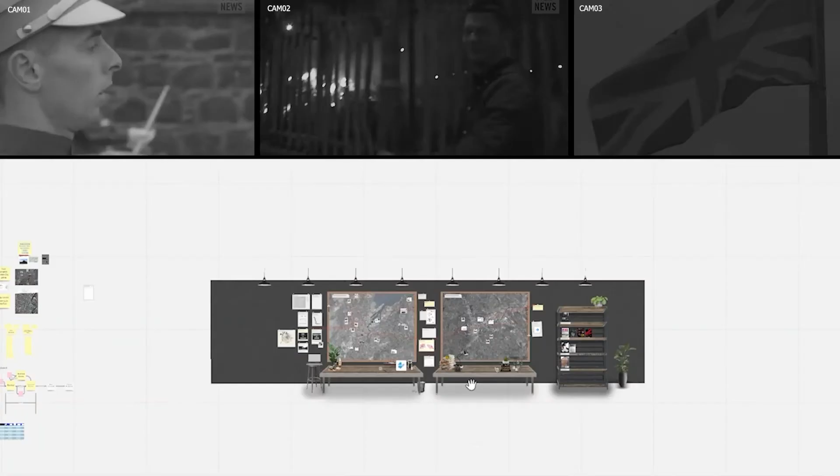Belfast is a city synonymous with the Troubles, but whilst known for the physical barriers that divide communities, it became apparent that the peace walls are just the manifestation of less visible socio-economic divides, especially those related to deprivation, access to food, and essential public services within the city.

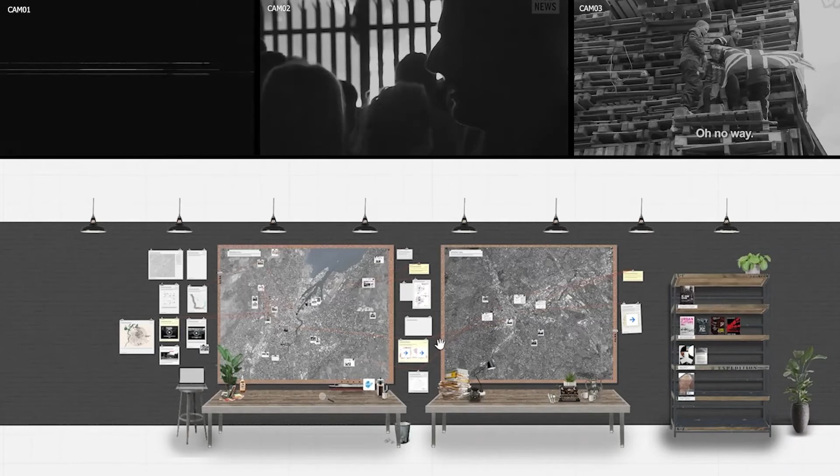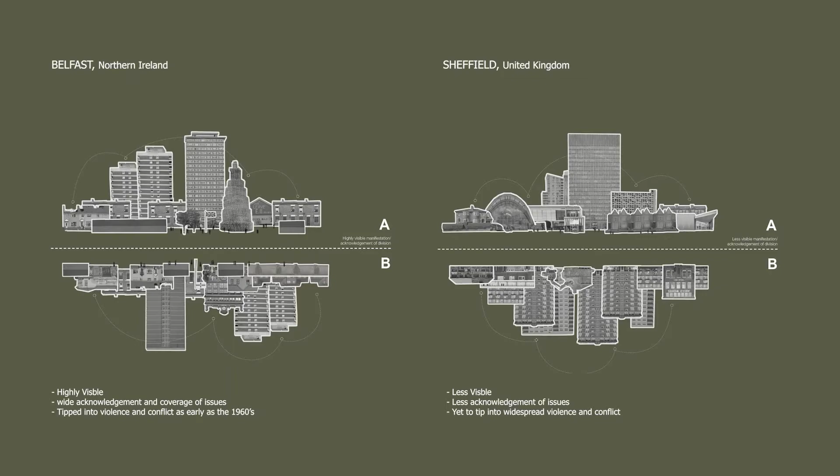Exploring the divides within the city of Sheffield allowed us to explore a more nuanced look at the divisions in the Northern Irish capital. Peace walls stretch 21 miles, and whilst constructed to separate communities and keep the peace, they have prolonged a state of anxiety and tension.

What has resulted is 14 of 20 of the most deprived areas being located directly next to an interface, their history causing a lack of investment, mass vacancies, and high unemployment.

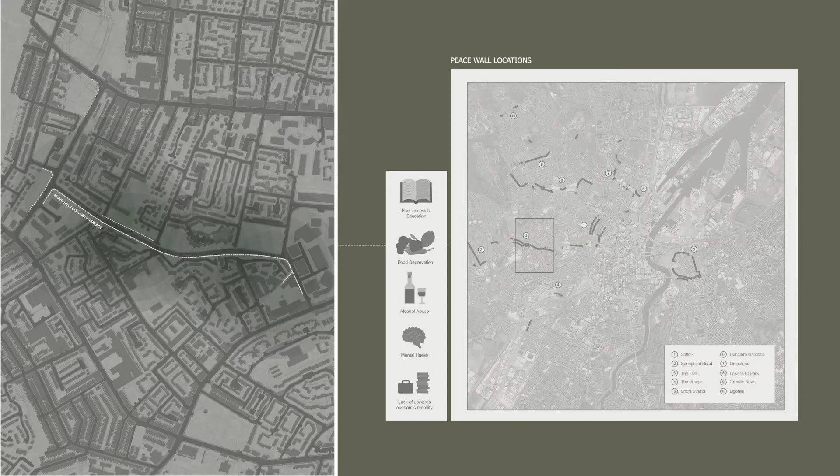The area surrounding the Shankill Peace Wall is a prime example of how proximity correlates with heightened levels of food deprivation, mental illness, and alcohol abuse. Unstable governance has only exacerbated these problems, heavily reducing public spending towards these areas.

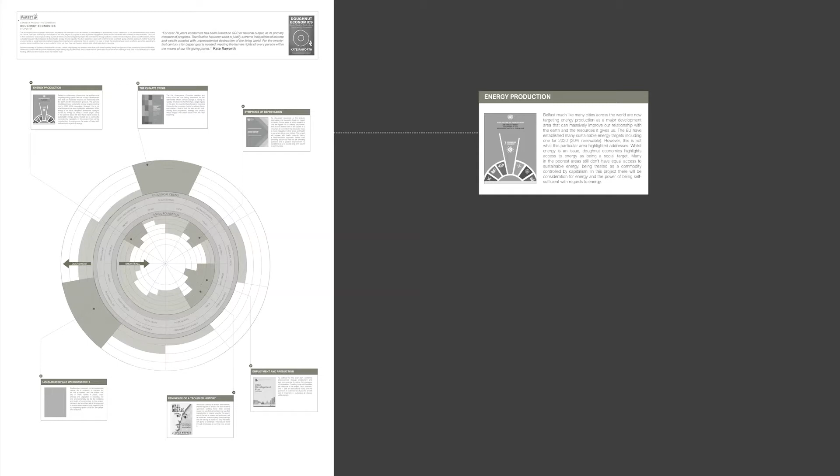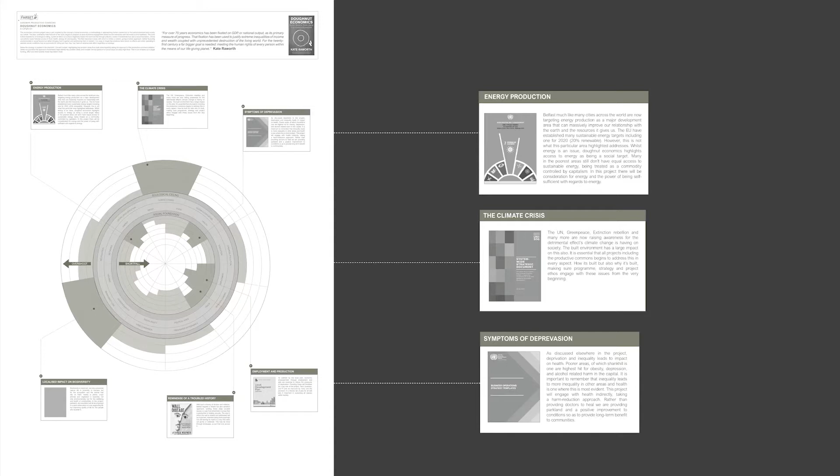The peace walls were erected as a short-term retroactive solution, attempting to solve complex grievances. It became clear that many of the social issues mentioned previously are tackled in a similar after-the-fact approach. Whilst a necessary component of a solution, food banks, rehabilitation centres, etc., aim to relieve the symptoms of the divided city after the fact, rather than tackling the societal challenges that cause them.

This project therefore engages with a more long-term proactive strategy to work alongside traditional support methods, targeting funding at deeper societal challenges, providing improved opportunities in education, employment, and quality of environment.

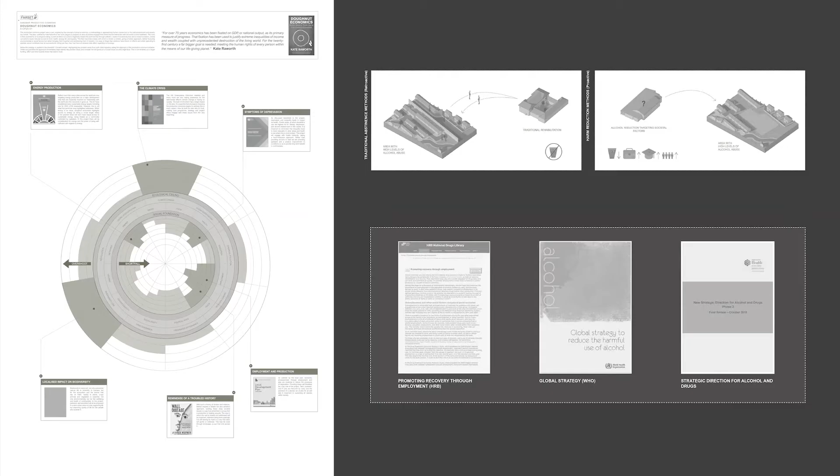Urban planning has focused on turning communities' backs on one another, creating a labyrinth of cul-de-sacs, fenced parks, and no man's lands that remain vacant.

In Shankill, we see the impact of these design decisions. This no man's land has an incredibly low density with a high vacancy rate. 60,000 square metres of land is wasted along this stretch of wall alone.

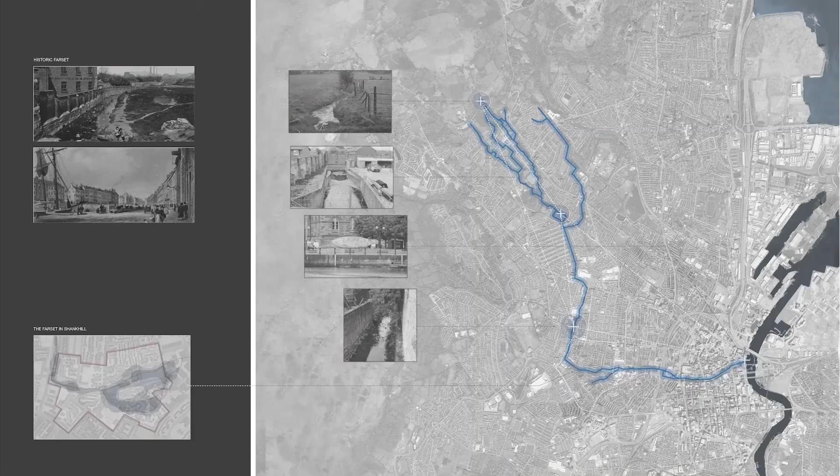Lying at points as little as half a metre below the pavement, running almost poetically along the line of the peace wall, the Farset River helped establish these communities before being culverted in the 1800s.

In its heyday, it supported the creation of industry, energy production, and a more integrated community, with shared investment and local trade before production was removed to the edgelands.

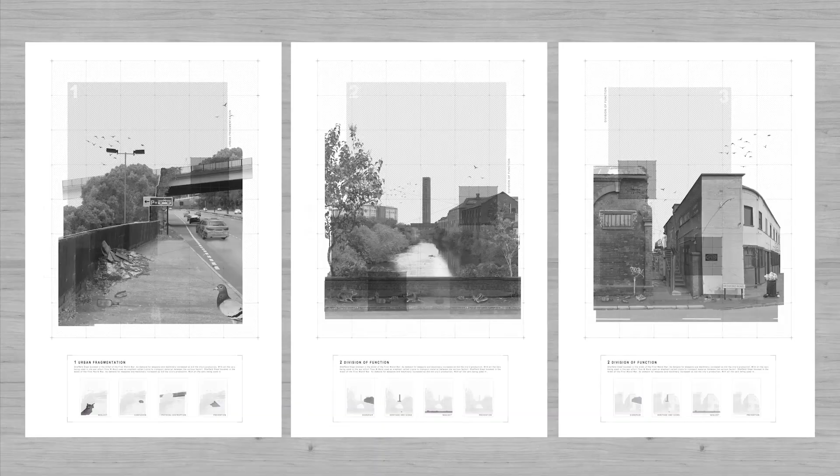Illegally distilled poitín, a homebrewed variant, became an act of activism. Outlawed by the British for tax reasons, the act of production became political, and allowed many the ability to become economically independent. This project therefore begins to speculate.

What would happen if in 2025, aligned with the proposed removal of the peace walls, Belfast Council initiated the Farset project, using the long-buried river, returning it and the land either side to the people living in some of the most deprived communities in the capital?

A more proactive approach, addressing the symptoms of division, both socially and economically empowering the residents. The aim, to prototype and test the use of commonly owned productive land, and question its role in combating the symptoms of the post-conflict divided city, and to help dissolve formal and informal barriers within communities.

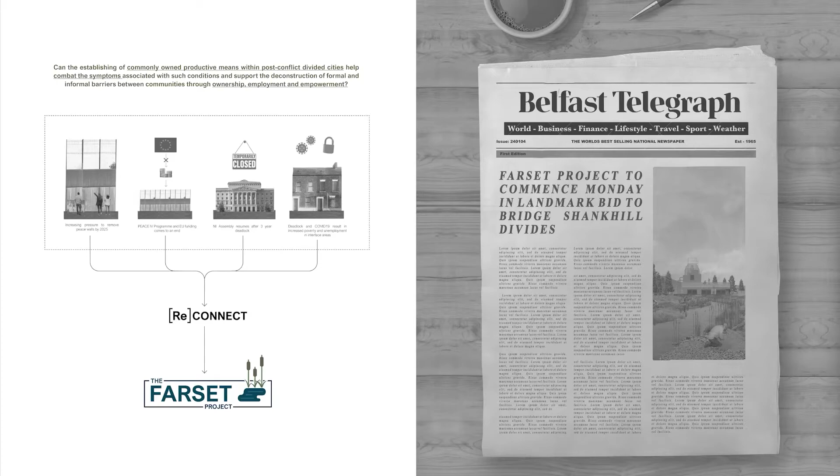Brexit and coronavirus make it a key moment for the city to propose new strategies relating to trade, production, and renewal. The river will enable a productive commons, community-owned and managed land, first using vacant sites that neighbour peace walls.

Northern Ireland's green space target was used for scale, and production is to include the growing of crops and construction materials, utilising rewilding to provide new parkland, woodland, and wetland.

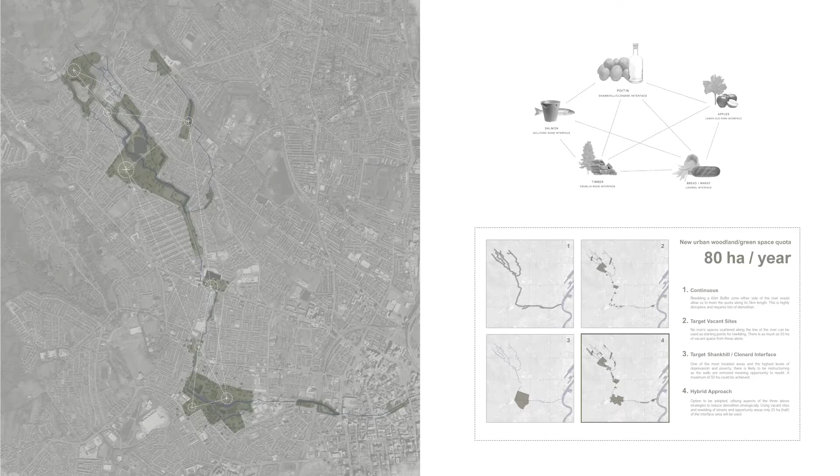A distributed network will link the divided communities together, the various processes providing jobs for a range of skill sets and the ability to invest money back into these communities.

Here are some explorative collages, the river creating a more productive permeable barrier, and the reintegration of both industry and nature back into the proximity of communities.

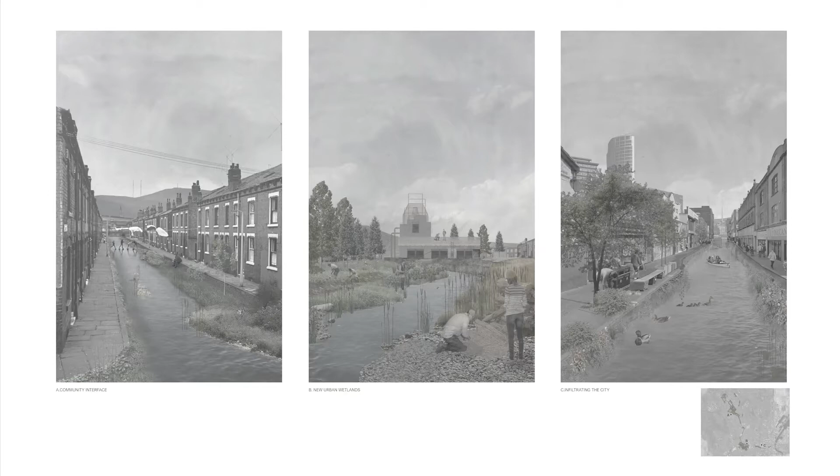The heart of the commons will lie around the Shankill interface. Potatoes, apples, and other regional crops are produced.

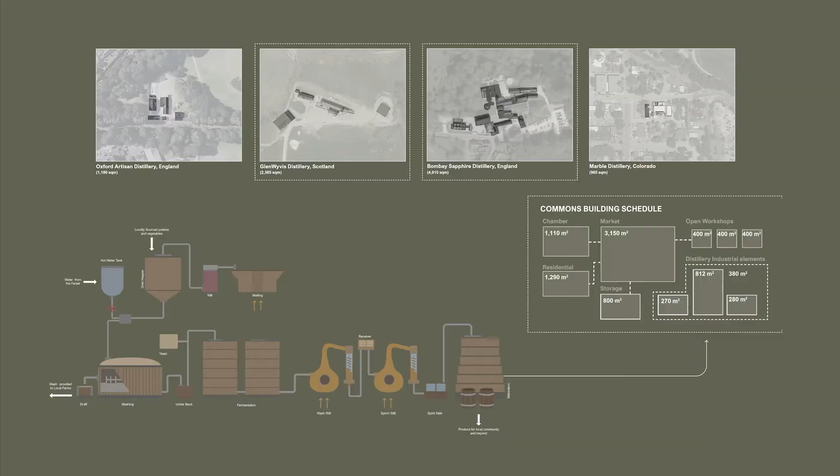An unconventional mixing of functions, a main commons building is to become the central point of governance, combining spaces for commons management with a market to bridge the gap between production and consumption, and a distillery producing poitín, making use of the locally sourced produce.

The commons becomes an independent zone where production is legalised. The project is initiated in 2025.

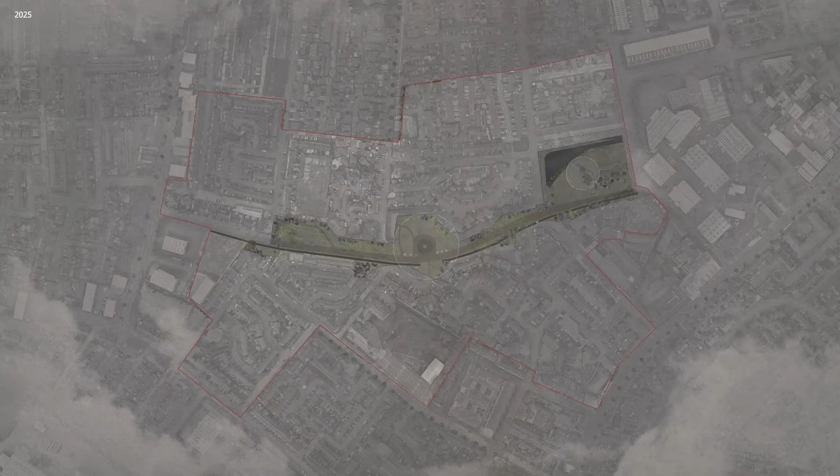Vacant sites are reclaimed near to the wall, and the rewilding begins. Cupar Way is reclaimed, the first element of the wall is removed, enabling the community to begin consultation and establish the community land trust that will manage the commons.

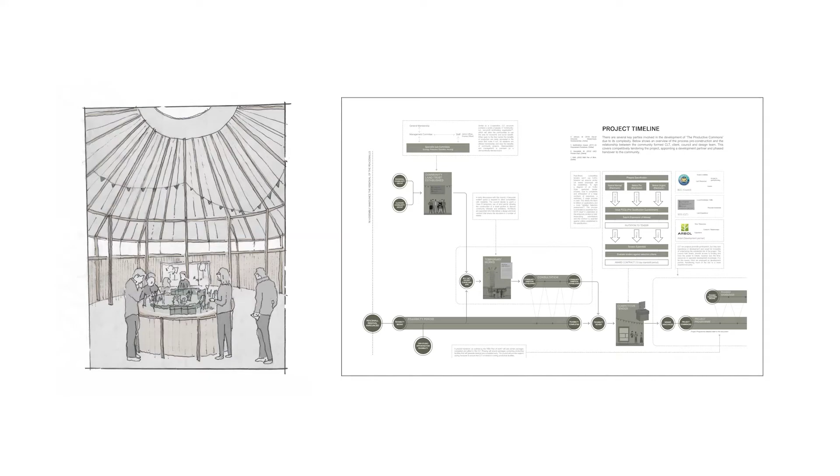Beginning with light touch reclaiming of the abandoned plots, the commons will spread from the wall, a series of productive pavilions being deployed as the area is restructured.

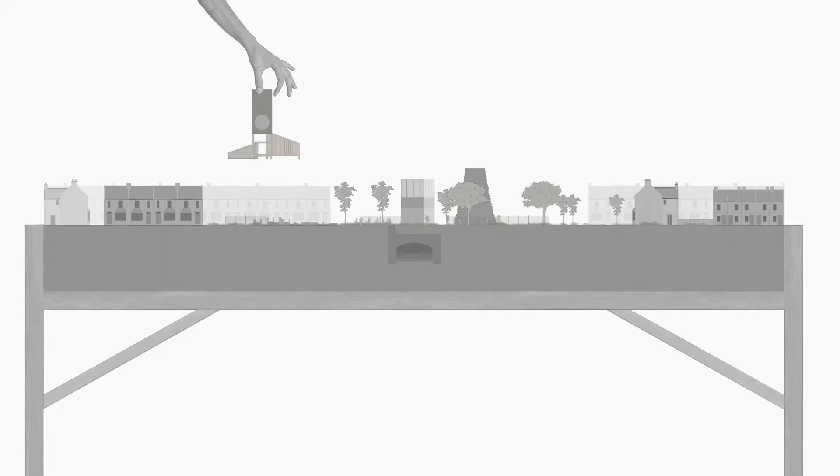The river is revealed supporting this new production, with densification around the peripheries to support the few who were displaced. Whilst often controversial, the incredibly low density of the area and its dysfunctional nature make densification a viable strategy, supported by future planning guides and reports, targeting 60 to 70 units a hectare.

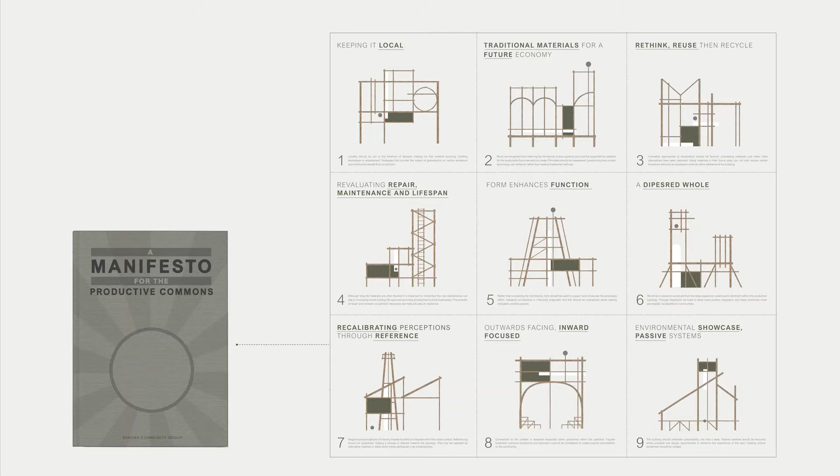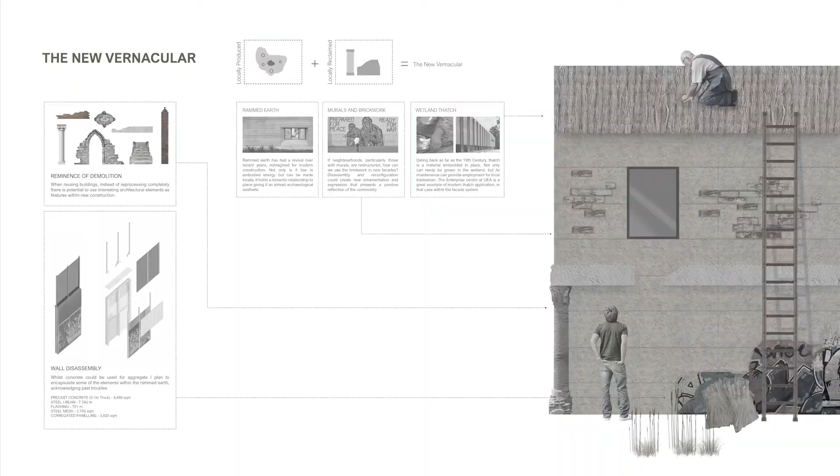With much of the wall still in place, it is used for growing, a meanwhile project to be replicated across the city. The community established a manifesto for their architectural approach, emphasising locality. Reuse is favoured, making use of the resources of the abandoned homes, and repair is recognised for its benefits to education and local employment.

The material palette uses not only locally produced timber, but rammed earth from the groundworks of the common land. Routes and phasing were developed through the layering of both historic routes that traverse the site and the line of the river. In 2028, demolition begins on some of the vacant properties nearest to the wall, enabling the rewilding spread and production to begin.

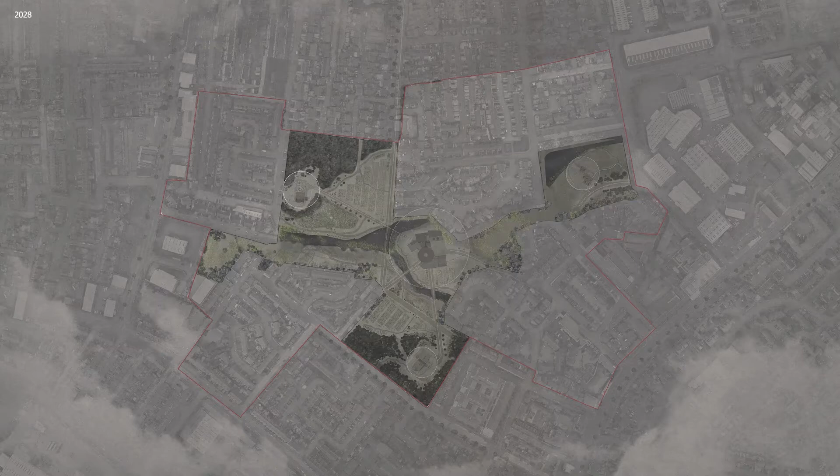The first of a number of productive follies is constructed in the remnants of one of the homes. Its purpose is to collect, prepare, and store the material reclaimed from the homes, to be used in the construction of the Commons building and the surrounding area.

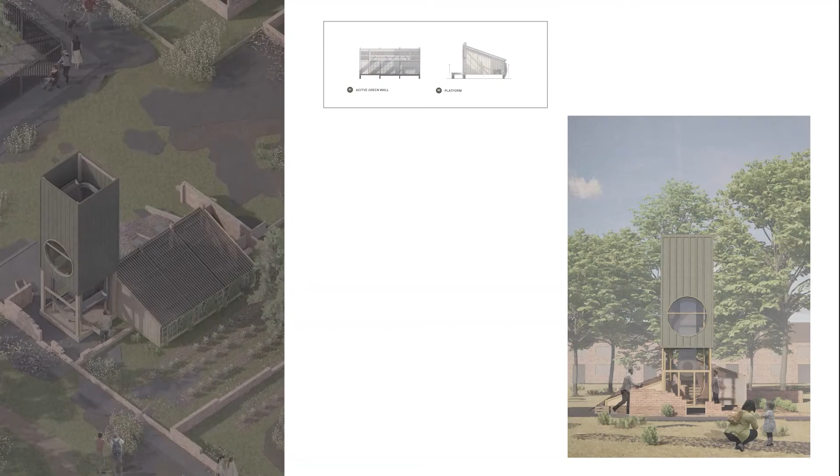Space is provided for the testing of a site-specific mix of rammed earth, which is to be used across the Commons. The demolished housing and land displaced for landscaping is catalogued and used within the Commons.

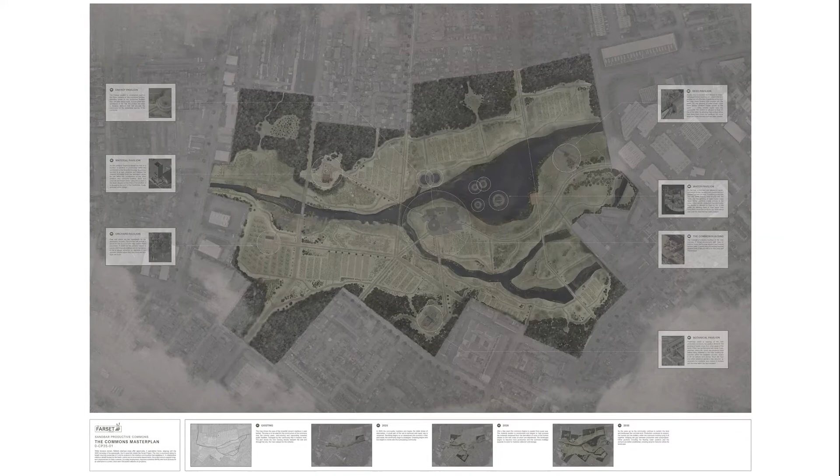The Commons continues to grow, spreading from these vacant sites, creating the new parkland. The landscape holds not only the Commons building, but a range of follies supporting productive activities. An overlapping of natural and logistical straight paths, with dispersed elements all linking back to the centre.

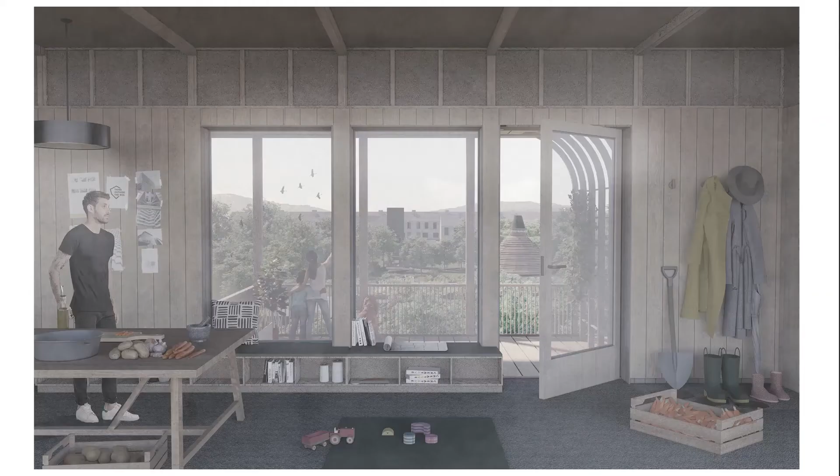Here are a number of studies showing the created ecotones that will foster biodiverse but also dynamic conditions across the site. As mentioned, high-quality housing for the few residents whose homes were removed will be constructed on vacant sites that now sit on the peripheries of the Commons, with views out across the parkland.

As always, the rolling hills of the Black Mountain and Divis serve as a backdrop overseeing the restructuring. A number of pavilions are constructed, including the Groundskeeper's Pavilion, a botanical garden, not only serving to facilitate the distillery of fruits for flavouring, but creating moments of discovery and excitement within the Commons.

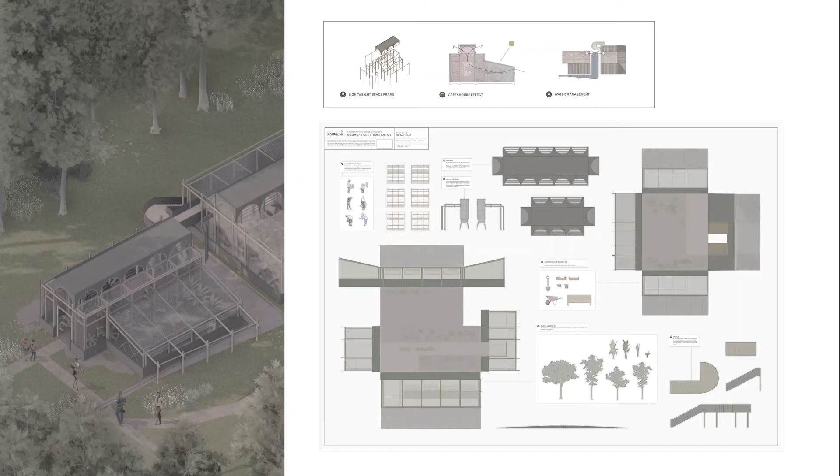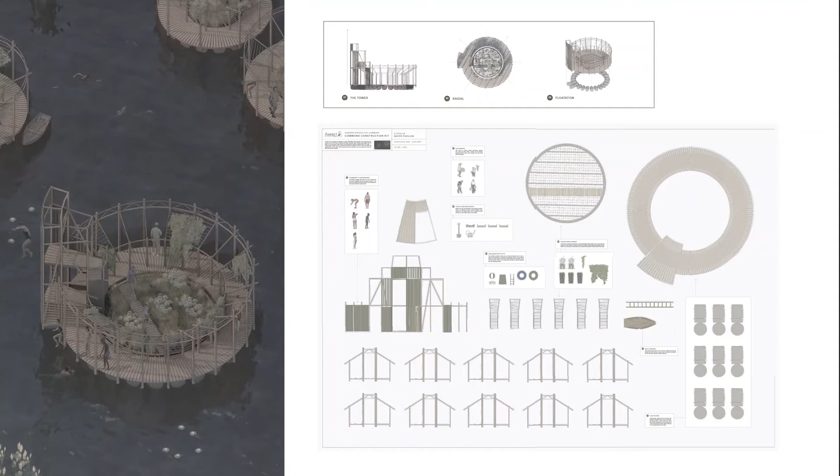Likewise, floating aquaponics gardens on the lake created in the centre experiment with new growing techniques, but also engage with the community through play in the summer months. All pavilions have been designed as a simple kit of parts to be assembled by the community.

A feature in the wetland, the Thatcher's Pavilion provides resources for workers to collect reeds and engage in the long-standing tradition of thatch production. The platform extends out towards the water, and the structure doubles as a hide, presenting opportunity to observe birds, beavers, and other animals that create their home within the parkland.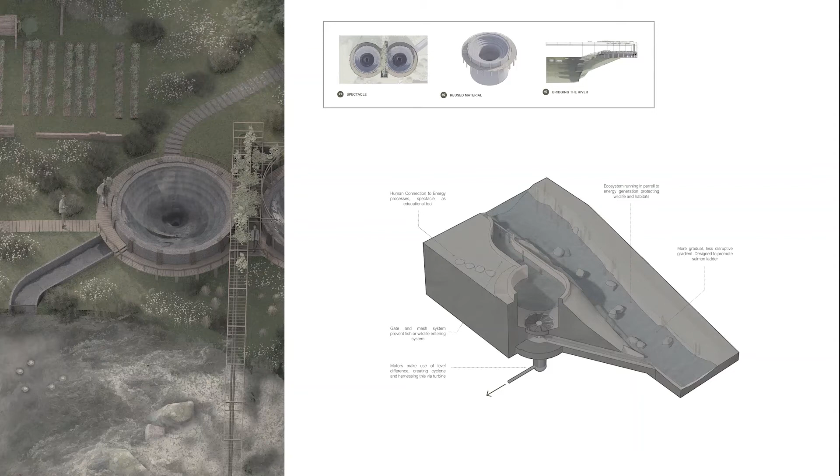A pavilion for harnessing the power of the Farset is also constructed, adjacent to the new Commons building, and is used to power productive activity. Making a feature of the process, it begins to highlight the sustainable agenda of the initiative.

The form was developed through the breaking down of a rigid external rammed wall, responding to the immediate landscape. Multiple means of approach respond to its shared ownership, and allow the landscape to reclaim the central space over time. Treating the rammed earth exterior almost as if an existing structure, materiality breaks down into softer timber facing the courtyard.

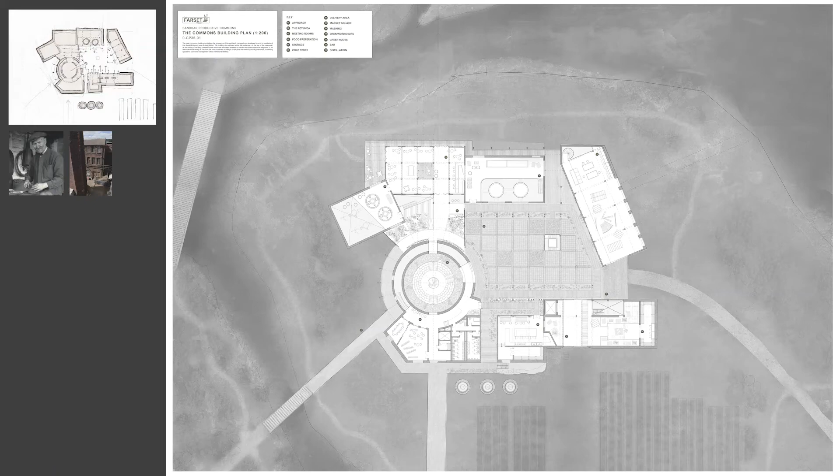This all revolves around the rotunda, a central space where the community can come together to oversee the Commons. The only circular element in plan, the rammed earth walls breaking down.

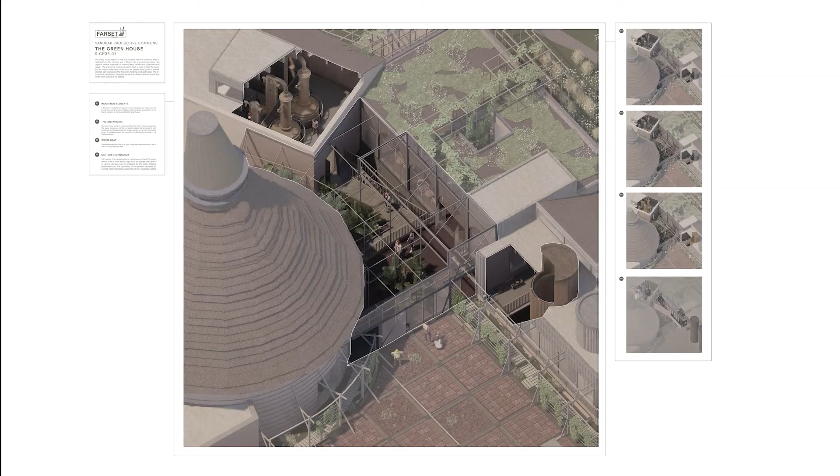The space looks through to an enclosed garden greenhouse that acts to connect elements of the building, but also makes use of some of the heat expelled from the distillation below ground. The greenhouse produces the few ingredients such as grapes and oranges that can't be grown as well locally. This is an example of the many cases where the line between leisure and production is blurred, intentionally to promote engagement and education.

Industrial elements were initially sunken, using the ground to control heat. Tall elements in timber and thatch rise above the rammed earth perimeter wall, revealing the previously illegal processes. The landscape was brought up on either side. The rotunda's form, referenced in the traditional oast house, enables passive ventilation.

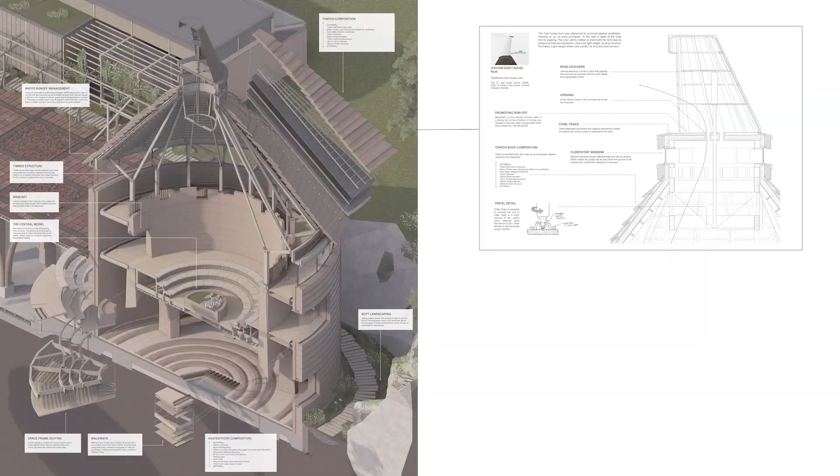The drying process occurs below the rotunda, and its form pulls the heat up, heating public spaces. The building opens up to the right-hand side towards the water, where air can be drawn through.

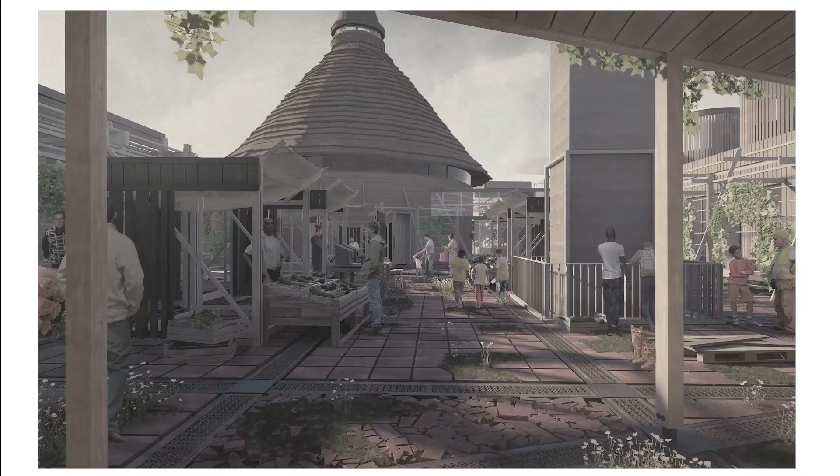Here we see the open workshops, another key space which plays off Belfast's upstart culture and provides essential spaces for a number of craft people to work in the Commons. Their craft is displayed in the courtyard, where we also see residents with produce of the Commons.

Here we see the permeable broken brick floor that manages water, capturing it for distillation and plant maintenance, but also allowing the landscape to infiltrate the central spaces.

Through the layering of the landscape, I wanted the building to respond to the passing of time, with the landscape that hides it morphing daily, monthly, and seasonally.

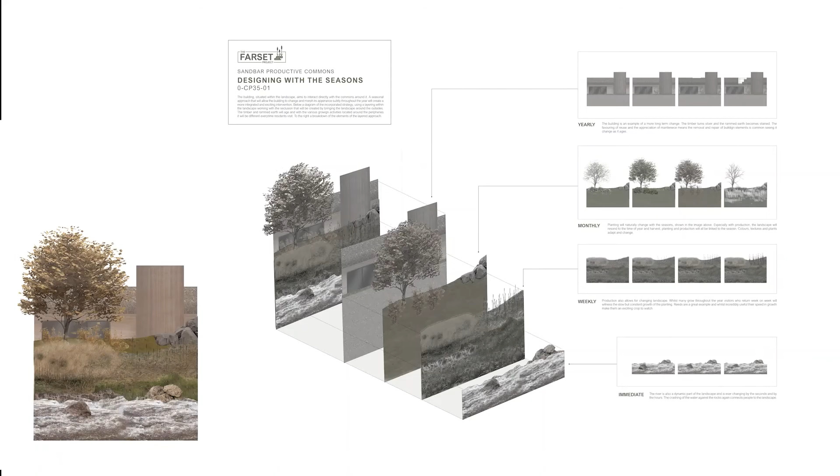In the summer months, parts of storage and workshop are opened up, allowing the landscape to creep back into the centre. A worn line in the grass, people congregate and discuss the harvest.

Inside the store, the light filters into the space, changing throughout the year, with glimpses through to the small kitchen, where small amounts of food can be prepared for markets and community events.

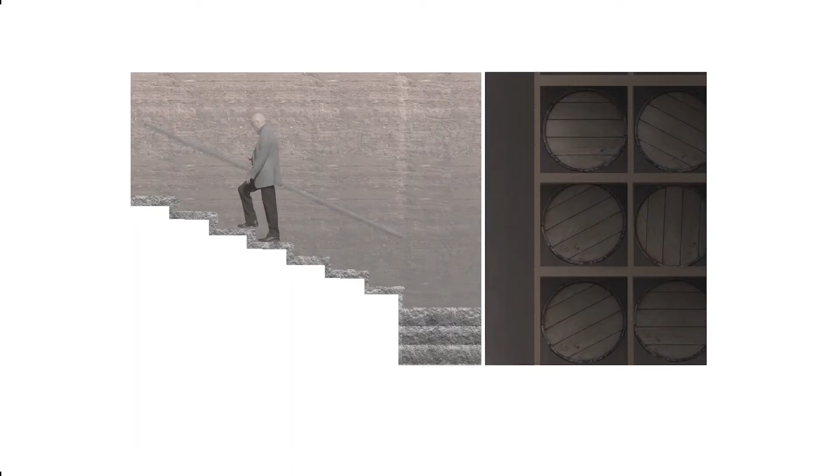Being sunken, the building begins to relate back to the earth that it is to sustain the community.

As visitors venture down into Cooper's Hall, home to the whisky stores, Coopers work producing new barrels, using the iconic arched barrel vaulted forms and scaling them to span the space.

With the parkland context, the building uses its basement in the winter months to store excess water when the stores are not active. The space doubles as a cavernous pool for the community, heated by that which is expelled from the other industrial processes.

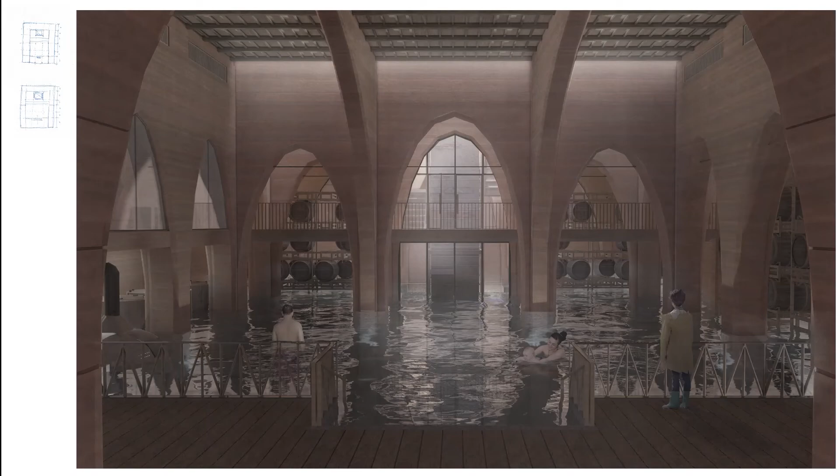A totem of rammed earth containing spolia, created from remnants of the divided city, brings light down into the space.

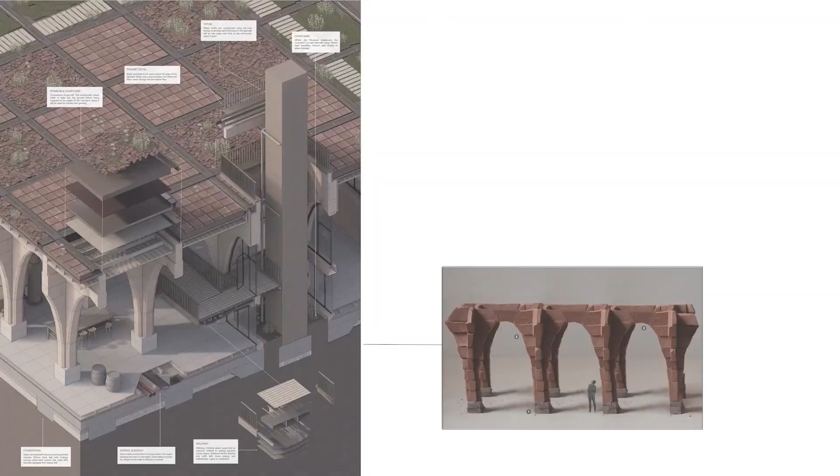Studies show some of the elements of spolia to be embedded around the building, archiving fabric from the city. This serves as a sensitive way to reflect on some of the area's more recent history.

Concrete lintels add texture to internal walls, roof tiles are used in rammed earth to create a horizontal rhythm, and a window from a derelict factory building is preserved within the fabric of the rammed earth.

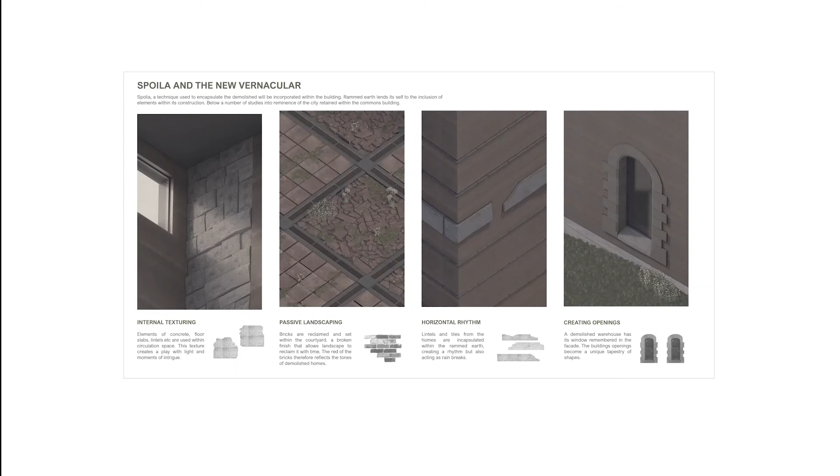Grating within the courtyard is used over the barrel vaults, which filters light coming down into the space, so as not to spoil the alcohol, and references a number of Celtic patterns.

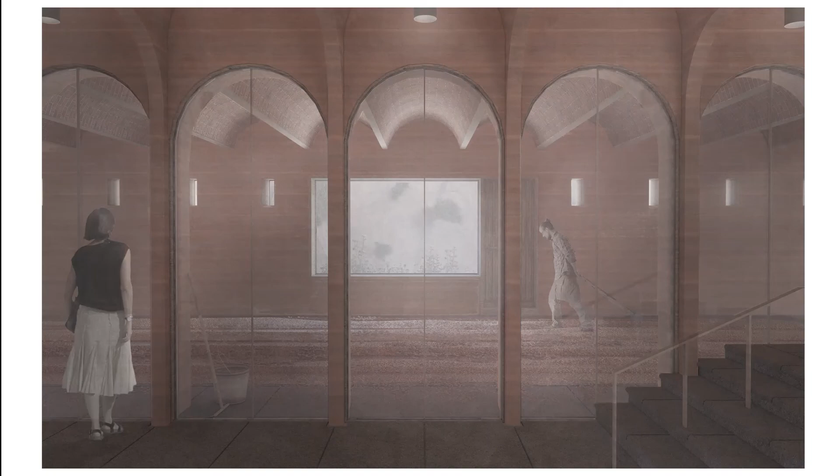Stepping back, some of the land around the edges brings light down into some of the other process spaces, such as the germination space seen here. This creates moments of connection between the industry and the earth, and continues to bring indirect daylighting into some of these more controlled process spaces.

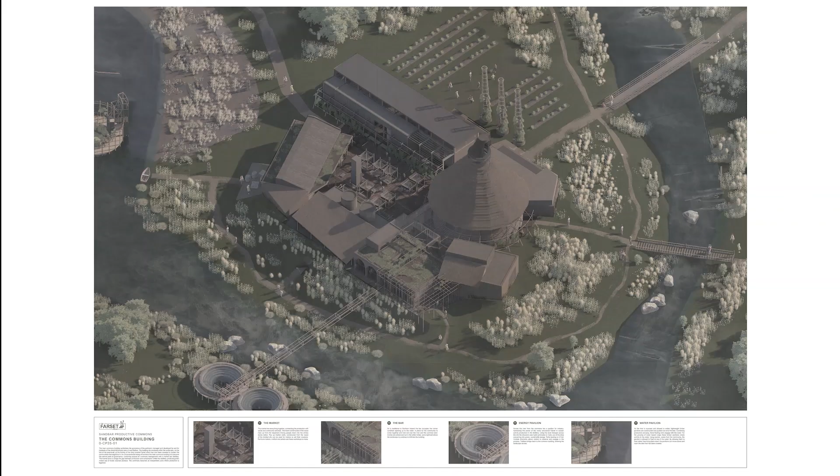In a number of places, industrial referencing has been used to recalibrate perceptions of industry, presenting a new, more compatible form of production. This is seen in the water towers constructed from timber, creating a trellis referencing the chimney that once sat on the site. From the massing, we can also see the sawtooth roofs of the open workshop and the fermentation space, which continue to reference industrial form.

We see the Commons building sat on its site at the splitting of the river, surrounded by formal and informal landscaping, a market being held in the central courtyard.

Timber frames extend beyond the rammed earth, defining walkways and paths, a move made to further create this connection to the earth, the building beginning to appear a work in progress or excavation site.

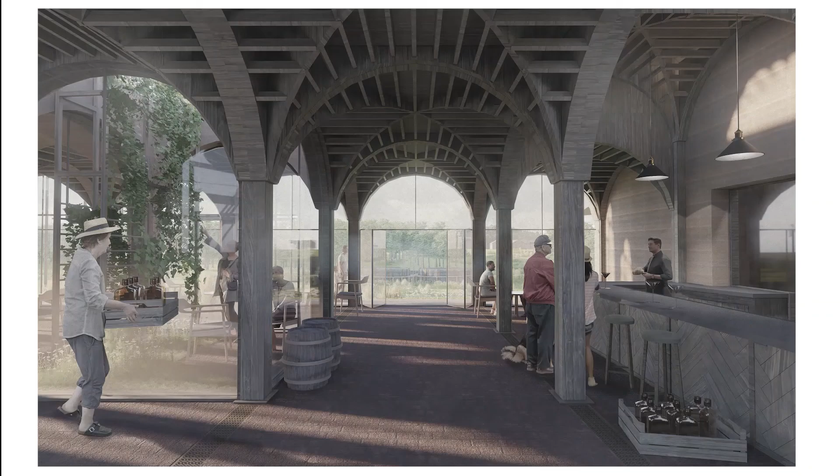As is tradition in Northern Ireland, the bar occupies a corner condition, opening up to the water, a place for the community to come together and to look out over the river and the common land.

Arches are referenced, but this time in softer timber, and a light well allows the landscape to continue to infiltrate the building. After the Friday meeting, the members of the community retire to the bar, served an Irish coffee made from the poitín retrieved from the basement.

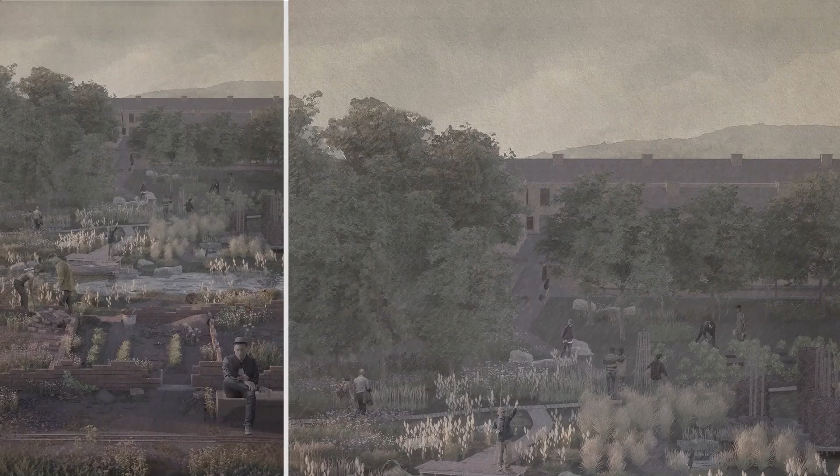This image shows the in-between. As the homes are being disassembled, residents start to make use of the material, the landscape and the community reclaiming the land, and growing beginning.

In the distance, the rolling hills continue to serve as a consistent backdrop to the commons. A line of bricks embedded in the earth remembers the line of the peace wall, a subtle feature in the landscape, a nod to the site's history.

Whilst a hypothetical scenario, a testing of concept, I believe the productive commons presents a case for a more radical ground-up strategy for the divided city.

Communities and residents have proven themselves to be passionate, skilled, and often desperate for change. This project aims to use this, using employment and empowerment to help redirect their energy from violence and conflict to more positive, productive, and communal means, helping promote a more peaceful future for the city.